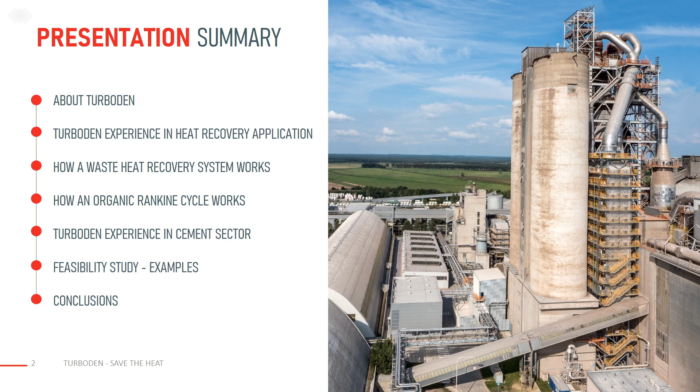Since its foundation, Turboden's mission has been to provide reliable and proven technological solutions for the enhancement of energy efficiency and for the valorization of renewable energy sources.

The company was founded in Italy in the 80s by Mario Gaia, a professor at the University of Milan. The first 15 years were dedicated to research and development, and some small pilot plants were produced.

Nowadays, Turboden is a global leader in the design, manufacture and maintenance of organic rankine cycle systems, highly suitable for distributed generation. ORC systems can generate electric and thermal power exploiting multiple sources, such as renewables, waste incinerators, engines or gas turbines, as well as waste heat from industrial processes. The size of the ORC ranges from 500 kW up to 20 MW with a single turbine.

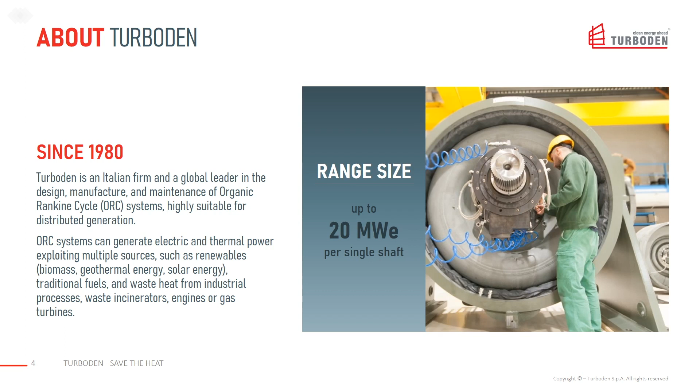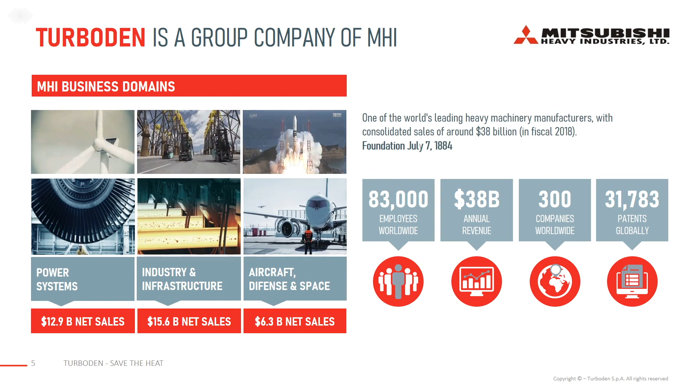Turboden is part of Mitsubishi Heavy Industries. In fact, it owns 51% of Turboden shares. MHI is one of the world's leading heavy machinery manufacturers. It is involved in the power system business, industry and infrastructure, aircraft defense and space. Turboden is part of the power system domain, and it can leverage the strength of MHI Group both on technical and financial support.

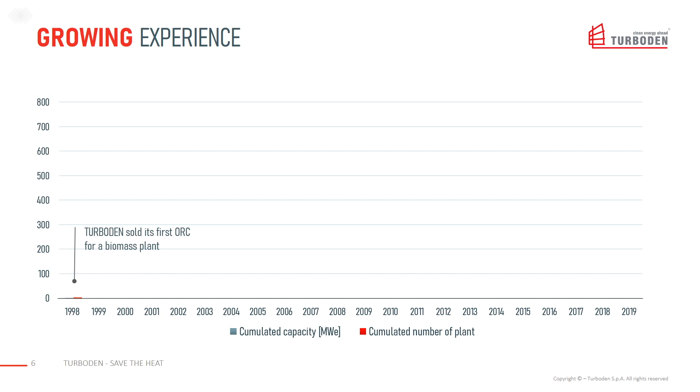Here we present our growing experience, both in terms of number of plants and cumulated capacity. The industrialization of the product started at the end of the 90s, when the first ORCs connected to biomass boilers were installed and started to spread into Europe.

It was in 2010 when the first ORC for waste heat recovery in cement started up, a 2 MW ORC unit for cement in Morocco. As said before, in 2013 we were acquired by Mitsubishi Heavy Industries, and starting from then the size of the ORC has increased, and now the largest ORC turbine can produce up to 20 MW.

Today we count almost 400 units, with a cumulated capacity of 660 MW. In the last years, we have also developed other products, like gas expanders and large heat pumps.

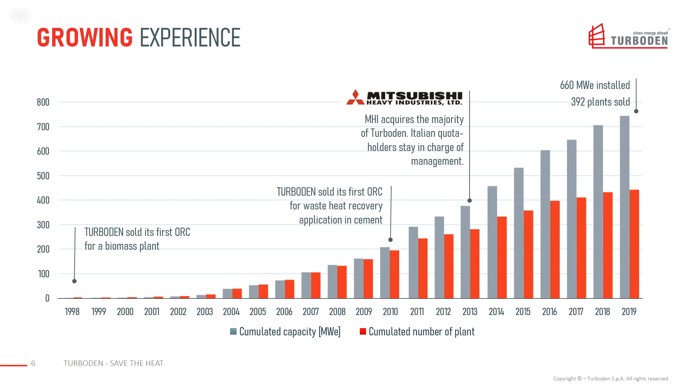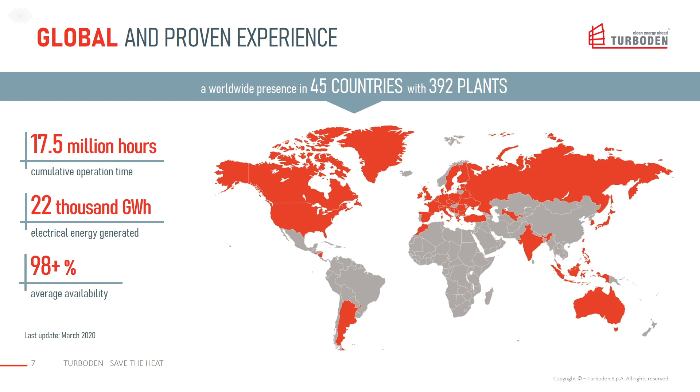Focusing on waste heat recovery application, out of the 392 Turboden ORC plants, 34 are installed in industrial plants for a total of 80 MW installed. 30 of them are already in operation worldwide in several industries like cement, glass and steel.

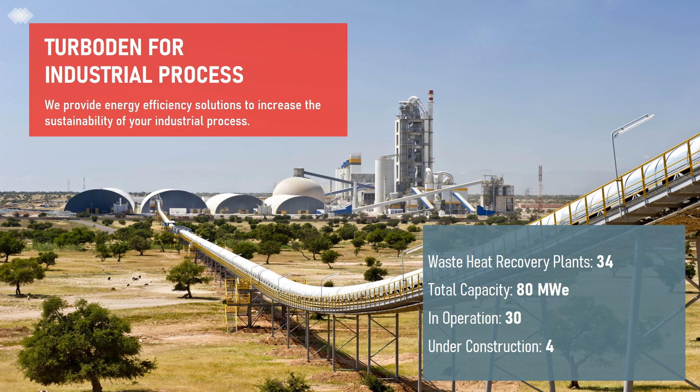Turboden ORC units can produce electricity by recovering residual low-grade heat from industrial processes and also from reciprocating engines, gas turbines operating on open cycle. It is possible to combine the heat from different heat sources and feed one single ORC.

Here a list of reasons explaining why to choose ORC for energy efficiency. First of all, to generate profit, leveraging a heat source that now is wasted. In addition, there is a reduction of specific production cost by decreasing energy demand. Of course, energy-intensive industry sustainability improves and there is a reduction of CO2 emissions.

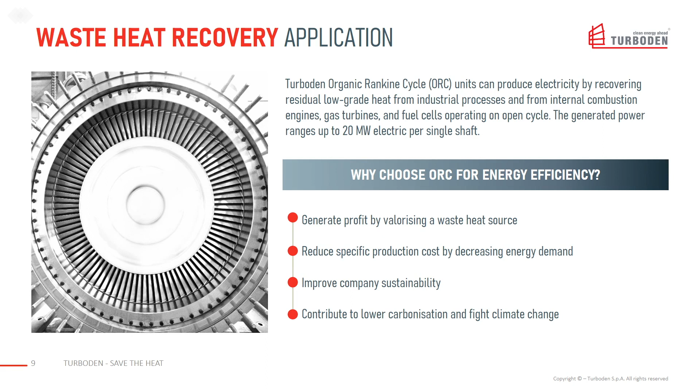The hot exhaust gases produced in the rotary kiln are firstly used in the cyclones to preheat the raw material, and then, at a temperature of approximately 350 degrees, could be transferred to a heat recovery exchanger where the residual heat is recovered by heating up an intermediate fluid.

The second heat source is the clinker cooler, where the hot clinker produced in the kiln is cooled down using ambient air. This hot air at the clinker cooler's outlet is typically available at a temperature between 250 and 350 degrees, and can be recovered using a second heat exchanger.

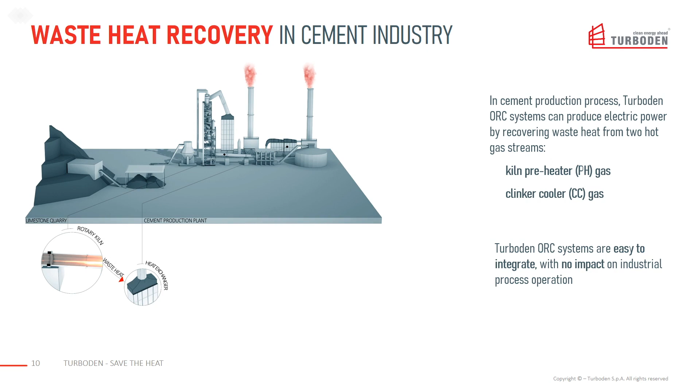This waste heat, transferred to an intermediate fluid circuit, is then sent to the ORC unit. In the ORC, the thermal power is converted into electrical power by means of the ORC turbine, and the excess heat could be dissipated in the atmosphere by means of an air-cooled condenser without water consumption. The electric power produced can be used to feed the cement plant's load, reducing electric power purchased from the grid.

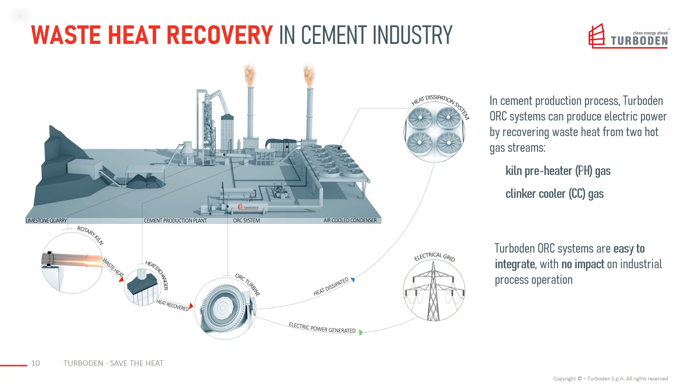A scheme of the waste heat recovery plant and its integration in the cement process is here shown. The two separate heat recovery exchangers are installed in bypass to the main gas duct. The two heat exchangers have different technical features due to the different characteristics of the exhaust gas, and they are optimized case by case. The heat contained in the exhaust gases is typically transferred indirectly using an intermediate loop to the ORC plant, which produces electric power.

The amount of electric power counts for 10 to 30% of the cement plant's electric consumption, meaning that the monthly electric bill reduces by the same percentage.

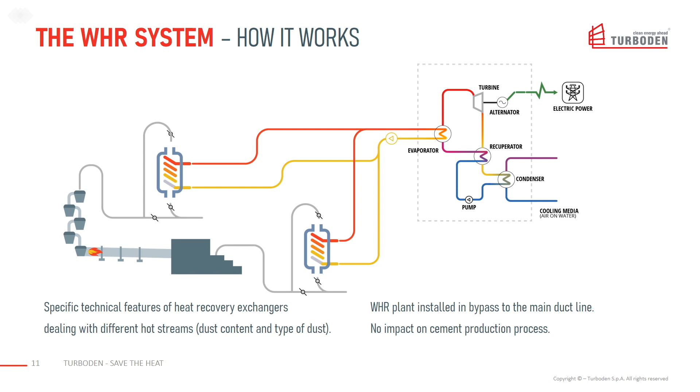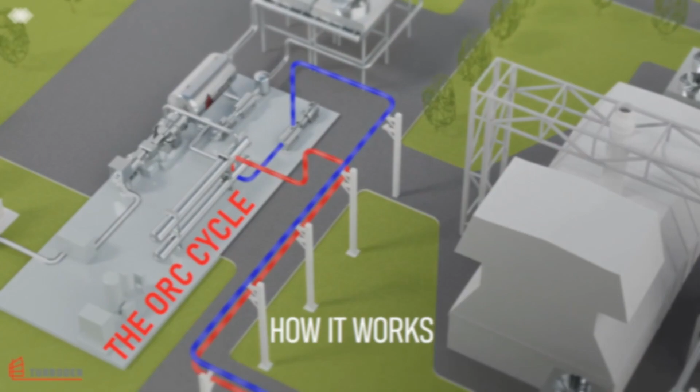After having seen the scheme of a waste heat recovery system in a cement plant and the main components to be installed, now we would like to focus our attention on the working principle of the organic Rankine cycle, watching this short video. The heat is conveyed to the ORC system by an intermediate thermal oil circuit.

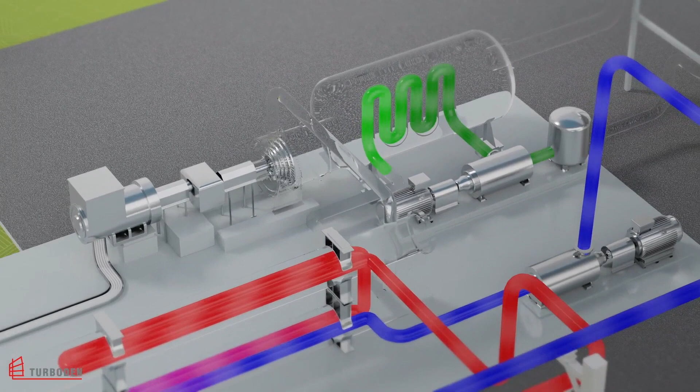The ORC working fluid, pressurized by a pump at the correct evaporation pressure, reaches the preheater and then the evaporator. Here it is warmed up and vaporized, allowing it to expand in the turbine, thereby generating useful power.

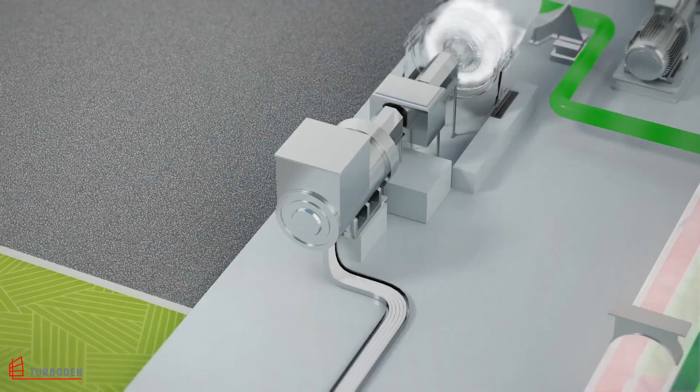The power generated by the turbine is converted into electricity to cover the captive consumption of the cement plant or to be sold to the grid.

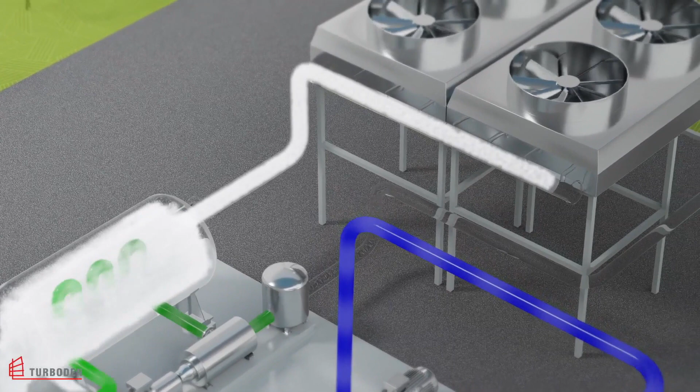After the turbine, the vapor enters a regenerator for internal heat recovery, and it is then cooled down and condensed in an air condenser. Lastly, back in its liquid form, it is conveyed to the hot well, from where it is reintroduced into the cycle by a pump.

Now that you know how an ORC works, you may ask yourself, what are the differences between ORC and the traditional steam Rankine cycle? First of all, the ORC uses an organic fluid instead of water. Several families of organic fluids can be used. Turboden has used up to 10 different organic fluids like refrigerants, siloxanes, and various types of hydrocarbons.

The main thermodynamic difference between the two cycles is that water steam must be superheated before expanding into the turbine, while organic fluid vapor doesn't need to be superheated. So the saturated organic fluid vapor can expand in the turbine without possible liquid formation. The expansion is always dry thanks to the shape of the liquid vapor equilibrium curve.

This means that in the ORC turbine there is no risk of blade erosion. On the contrary, steam turbine blades may be damaged by water droplets that can form when superheating is not at the proper level. Sometimes we do superheat, but it's done to increase the electrical efficiency of the cycle.

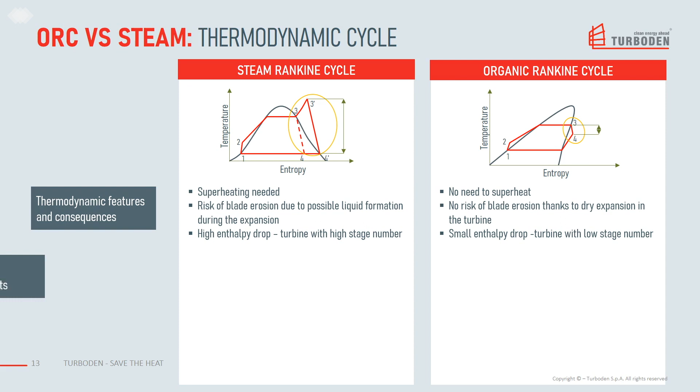Which are the advantages for a cement producer to have a waste heat recovery plant based on ORC instead of steam? ORC does not use water, so there is no need of a water treatment plant, like in a steam-based WHR plant. The water used in the steam turbine needs a specific quality, so there is a need of water treatment to control the quality of water sent to the turbine.

Steam turbine needs also to be supervised continuously, while ORC has a high level of automation and there is no need of any supervisor, allowing the cement operators to focus on core business. Furthermore, no major overhauls are needed in an ORC, while steam turbines need periodic overhauls.

High operational cost leads the steam Rankine cycle to be a technology more convenient for plants larger than 15-20 MW, and when the gas is at high temperature.

Other differences are related to the low flexibility of steam, with lower performance at partial load. On the opposite, ORC has high flexibility and a wide operational range. In fact, it can easily work between 10 to 110% of nominal load, with an average availability higher than 98%. These two factors are important to maximize the energy produced per year, which is a combination of power produced at different operating loads and the plant availability.

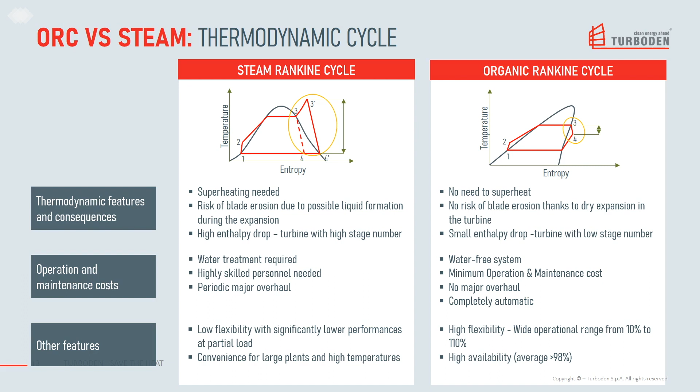Looking in detail at partial load behavior, from the graph shown here, it is possible to see how the electrical efficiency varies when changing the thermal load input to ORC and steam turbine. While ORC maintains a high efficiency even at partial load, steam technology has a stronger decrease in electrical efficiency when not working at design condition.

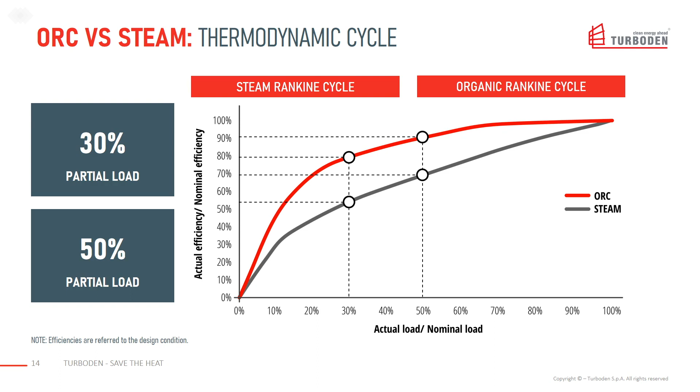When ORC is fed by half of the thermal power, the electrical efficiency is 90% of the nominal one, while in a steam turbine it is much lower. Besides good partial load efficiency that can follow the variation in cement production, ORC is a technology that can leverage low temperature heat sources. This is well combined with the fact that new cement plants are becoming more and more efficient, and consequently the gas temperatures available for heat recovery are lowering.

I would like to recall attention to the possible ORC configuration with no water consumption. As you know, lack of water is already an issue in several countries, and soon it will be an issue worldwide. So a solution that avoids water consumption should be considered by every cement producer.

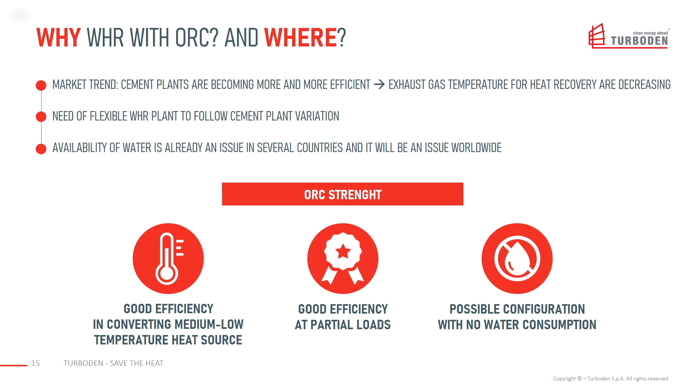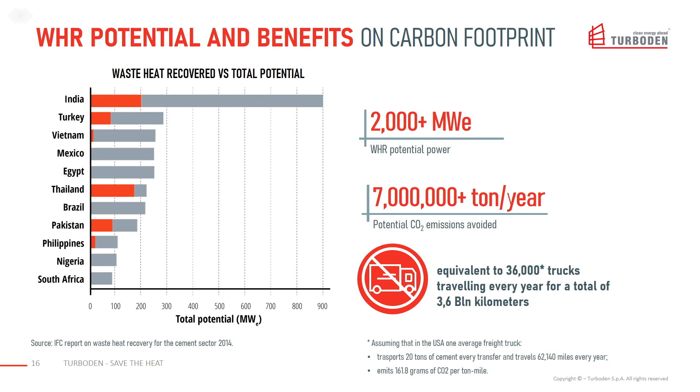Waste heat recovery is not a new topic in the cement industry. There are already several plants in operation for 20 years, but the potential is still huge. As reported in the bar chart, there are several countries with a potential higher than 100 MW, for a total cumulative WHR potential in cement plants higher than 2 GW, which corresponds to more than 7 million tons of CO2 avoided emissions. To give you an idea of the quantity of CO2, it's like 36,000 trucks traveling in a year, for a total of 3.6 billion kilometers.

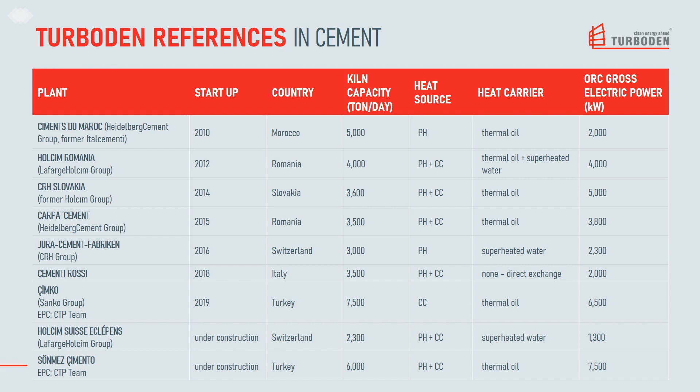Several international groups such as Lafarge-Holcim, Heidelberg, and CRH repeatedly selected Turboden as ORC supplier. The heat is recovered from both preheater and clinker cooler, or from only one of them, depending on the specific characteristics of the cement plant. There is also a wide variation of heat carriers used. The typical Turboden approach is to customize and optimize the waste heat recovery plant to maximize the electricity produced per year, and thus the profit for the customer.

The first plant in a cement factory was installed in 2010 in Morocco for a cement plant of Italcementi, now part of Heidelberg Group. The heat is recovered by the preheater only, with an intermediate circuit using thermal oil, and the ORC produces 2 MW. Several ORCs followed this first one, like a 4 MW ORC unit started up in 2015 in Fieni, Romania, for Heidelberg Group.

Heat contained in preheater and clinker cooler exhaust gases is transferred to the ORC through a thermal oil circuit. The condensation of the organic fluid is done in an air condenser, so no water is used nor consumed in the heat recovery plant.

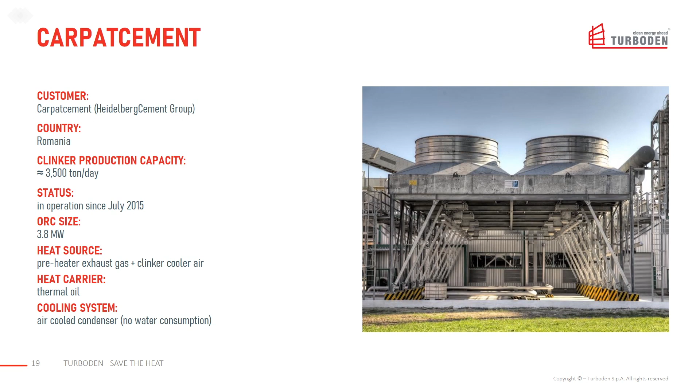Holcim Group developed 2 projects with Turboden, one in Aleșd, Romania, a 4 MW ORC started up in 2012, and a second one in Rohožník, Slovakia, a 5 MW ORC unit working since beginning of 2014. Also in this case, there are 2 thermal oil heat exchangers in bypass to the conditioning tower for the preheater and to the air-to-air cooler in the clinker cooler. Thermal oil coming from the 2 heat exchangers is unified to feed a single ORC unit.

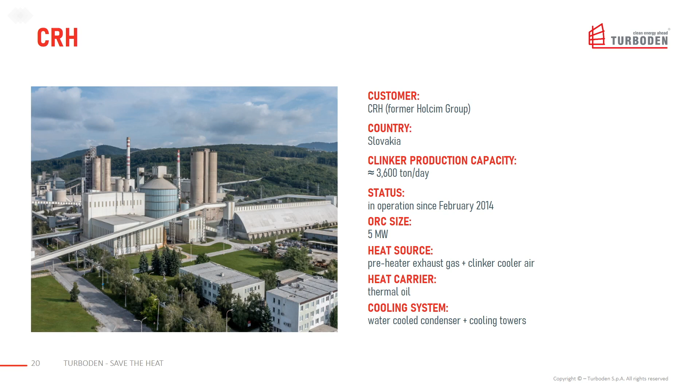In this case, an open cooling water circuit is used to condensate the organic fluid.

In the last years, our first reference in Turkish cement was put in operation in Çimko, Sanko Group. The ORC recovers the heat from the clinker cooler only, and it produced up to 6.5 MW. An important factor for the selection of ORC technology was the advantage not to consume water. Water consumption is becoming an issue everywhere, and not only in areas where there is already a lack of water.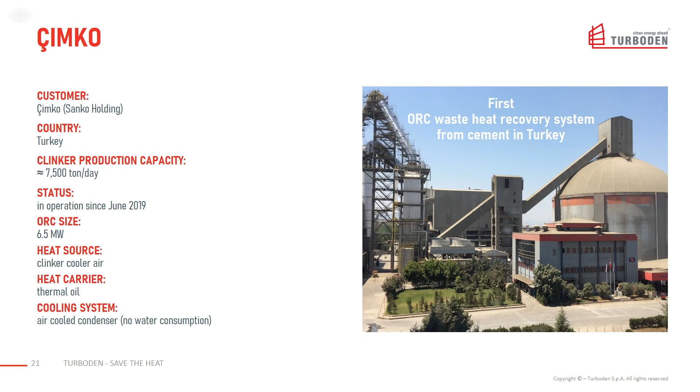After this first ORC in the Turkish cement market, a second one is ready to start up in the next months in Sönmez Çimento, a 7 MW ORC.

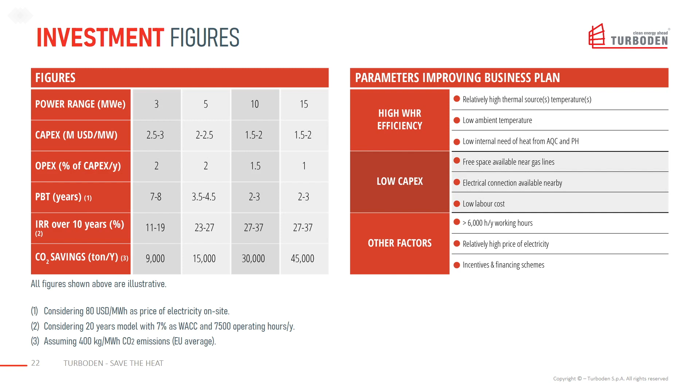Furthermore, possible incentives or different financing schemes can also help increase the feasibility. In general, the specific investment cost decreases for larger ORC turbine sizes, leading to a very good payback time below 4-5 years for ORC units larger than 3 MW.

I hope all of you share our vision. We believe in a viable sustainability where renewables and waste become the main source for heat and power generation, thus playing a key role in the global decarbonization path.

To conclude, global decarbonization and sustainability are the right pathways to safeguard the world for the next generations. Turboden, with more than 40 years of experience in ORC technology, can make a contribution by providing energy efficiency solutions to the industrial sector. Turboden can offer tailor-made and innovative solutions to minimize investment cost and optimize the economic feasibility of the project.

The proposed waste heat recovery systems are in parallel with the existing production process, so they don't have any impact on it.

ORC units are fully automatic, unmanned, with low operation and maintenance costs. They do not consume any water, they have high flexibility and good efficiency even at partial loads. In addition, the availability of a waste heat recovery system is high, leading to a maximization of the energy produced and reducing specific production costs by covering part of the energy demand.